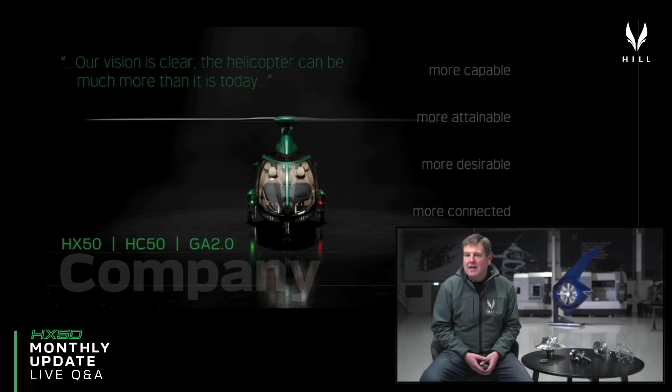Something that's more capable, more attainable, more desirable, more connected, and more owner-centric than ever before. And when you deliver a product like HX50, HC50, and the whole ecosystem for how we want these aircraft to be operated out in the world, it's not surprising then that the market resonates with you.

So in terms of our performance out there in the world, we're now up to 432 aircraft across 40 countries. That's 373 HX50s and 59 HC50s. We're absolutely delighted with the support that we've been given from around the world, and that really is a big motivating factor for everybody here in the team in the UK and our other staff around the world. So thank you very much for the support. We're absolutely delighted that the products are going down so well.

Of course, with a big order book and the need to deliver this aircraft, the team is also growing. I think I mentioned in some of the customer updates over the last couple of weeks since Christmas that we're currently advertising for a further 8 technical posts, and there's some more to come. We've been promoting some of our key people internally as well.

So Martyn Watson has now taken on the role of lead airframe systems engineer. We're going to talk more about the work he's doing later. And Stuart Marshall has picked up the role of lead GT50 engineer, so he's looking after a lot of the value engineering, the production engineering, and pushing that GT50 into a manufacturable artifact that we can get on the bench and test. So very, very pleased with the performance of these guys and the team in general. It's all going really very well. So that's all great.

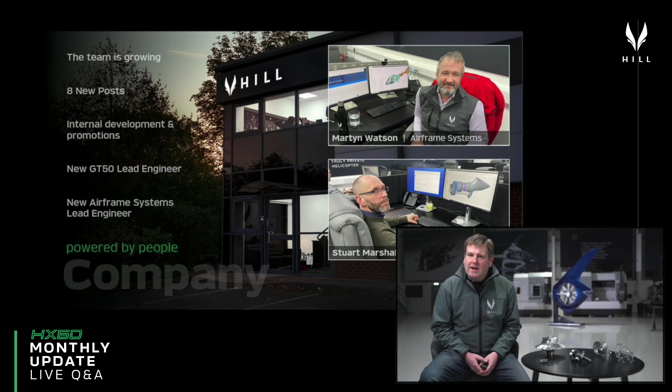In addition to that, you'll be aware from the materials we've pumped out on various platforms that our vertical integration agenda is crucial to delivering this aircraft at the price point and timescales we're indicating. As we continue to move towards the prototype build, the DC facilities are growing and expanding to meet those requirements. The major things going on in the DC at the moment in terms of building the capability and the business to build the aircraft: we've now procured a very advanced coordinate measuring machine and a metrology suite.

This is a temperature controlled environment that's going to be fitted just over there, allowing us to measure to extremely tight tolerances and high degrees of precision and accuracy the precision components we make - the compressor, bearings, gears, and a lot of the internal and flight critical components for the engine. That's a very key capability, and we've taken our time to get the right kit there because there are a lot of options out there. I'll talk more about that later. You can actually see the Leitz machine we've purchased in the top right hand corner of that slide.

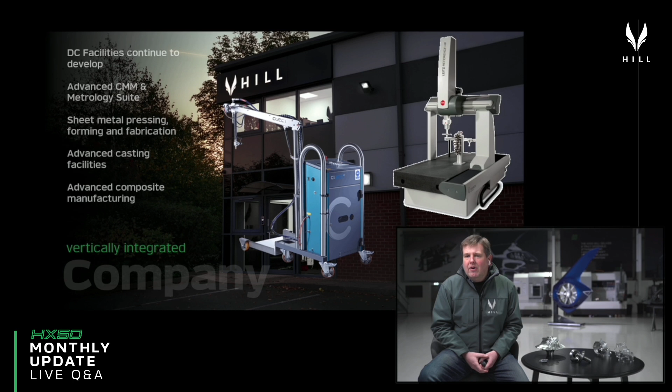We'll talk a little later about our annular combustor, but in addition to switching over to it, we're having to develop all of the manufacturing processes to deliver the sheet metal work in these complex, high-grade, nickel-based super alloys - to form those parts, weld those parts, fabricate those parts. There's a lot of work going on with experts both in the company and outside the company to bring that capability in-house. Although these materials are very advanced and the combustion system we're using is state-of-the-art, the equipment needed to press, swage, form and weld these materials isn't that sophisticated. So it's relatively inexpensive equipment that we're procuring.

Another big area, of course, is the casting capability. We've had all of the proposals back now from our suppliers for the shelling facilities, the wax facilities, the air cast and inert environment casting equipment, and we're in the final stages of getting that signed off and into the DC so we can cast the key cast components in-house. We're not held to conventionally understood industrial prices for these sort of things - we've brought it right back to what it really costs to make these parts. Very pleased to see that developing nicely. Bit of work left to do on it, but that'll be here very soon also.

The big news from the last monthly update was the successful completion of the third scale fuselage - this single piece composite fuselage that's critical to delivering our aerodynamic performance, crashworthiness, and the ride quality and dynamic response of the aircraft. The next stage is to get that process in-house so we can do all of the full-scale work right here at the DC for building the test articles and then the flying prototypes. You've been introduced to the infusion pump, the heart of all of that, but all of the peripheral equipment is now also on order and will be arriving over the coming weeks. Pleased to see how the general development of the facilities is keeping pace with the broader development program of the aircraft.

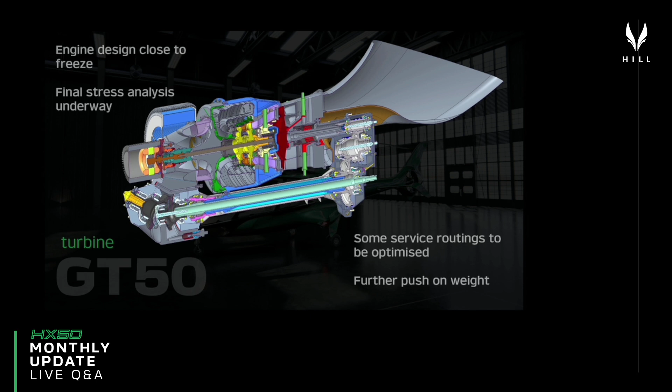So the engine in the new configuration - the much more compact vane diffuser, the annular combustor, and the new 9+9 bladed compressor - is almost at the point where we can freeze the design from a mechanical and operational perspective. That then allows us to move into a final pass through stress and lifing, and then we are literally ready to start building all of the components across that engine.

There are some service routings that need to be optimized. There's an opportunity to take a fairly significant amount of weight out of the engine by optimizing the gas generator bearing housing and also the power turbine bearing housing. That's the last area we're likely to be freezing the design for before it goes through stress and onto the bench.

That gives us an opportunity to have a final push for weight before we put it through stress and lifing. So very pleased with where we are on the engine.

I'm very pleased with the engine design, full stop. It's very elegant, very simple. We've managed to avoid building complexity into the engine as we've gone through development, which is often the case. All of the systems, the turbo machinery, the bearings, the spring bars, everything's looking really good on that front.

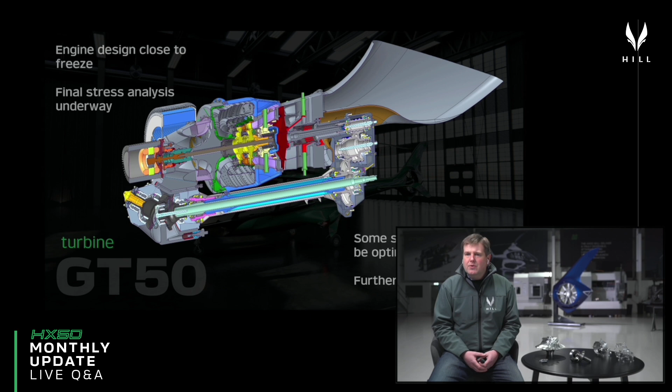So pleased with the development of it, very keen now to get it through stress analysis once more and start building these components. To that end, we demonstrated during the live event just before Christmas that we developed the ability to produce compressors in-house.

The compressor we produced was a 10-bladed unit derived from an original 12-bladed design that had been passed off aerodynamically. Working with both the production engineers and the aerodynamicists, it became clear the optimal solution was going to be around 9 blades with 9 splitter blades.

It's a little bit more challenging aerodynamically because you've got less guiding for the flow. It's more difficult to get the work you need into the airstream. But with a fair amount of CFD optimization and a lot of experience from our compressor team, we've now managed to get the performance in terms of overall efficiency of the impeller and also its stability, its surge margin, to a point where we're almost like for like with the 12-bladed design.

But of course this affords us significant advantages from a manufacturing point of view. We can get much bigger tooling into the cavities, we can machine the impeller much faster. The other advantage is that because we're using bigger tools, bigger ball noses, we have bigger root fillet radiuses at the roots of the blades that you can see on that impeller, and that improves the structural strength. It reduces the peak stresses in the compressor, improving both our fatigue life and our burst margin on the impeller.

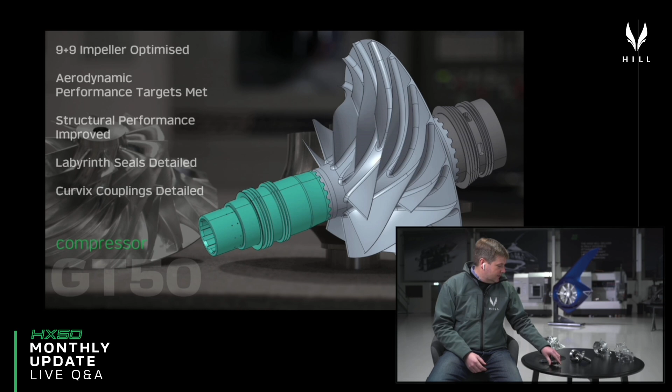The other thing I may have pointed out to some of you who were here with us last month is that when you take the compressors, the other thing we have to do is pressurize the back face of the compressor within the engine. So we create this labyrinth seal around the back face so that essentially we can pressurize the outer diameter and bleed off the pressure on the inner diameter to manage the axial forces this compressor generates by virtue of the pressures it generates along the shaft of the engine, and so manage the life and durability of the bearings.

So those sealing features have all now been optimized, and they're built into the machining operation and the compressor itself. Really pleased with where we stand on the compressors. The titanium from which we'll actually produce the test article is on its way to us now, and we'll shortly be producing 6 actual test specimens of the impeller to the design you can see on the screen. Pleased with how that's moving.

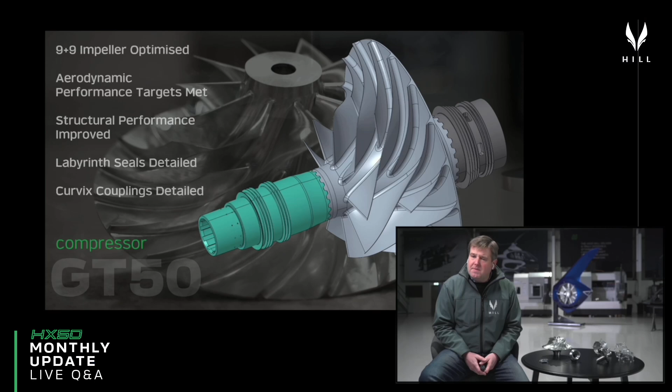There's a little bit of development work to go back and do on the compressor test rig now to allow us to test it, but that'll also be underway shortly.

In terms of how we actually manufacture these components, one of the real benefits of our vertical integration strategy is that all the stuff you generally need to do after you've built and developed your prototype and you're trying to upscale to production, we're doing right now. So what I'm showing you here is our second generation approach to how we produce these impellers.

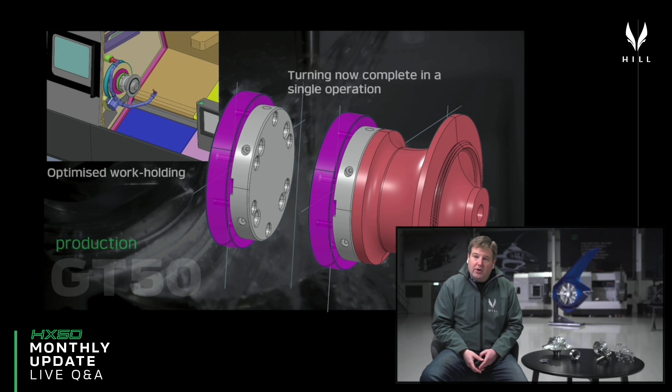The picture in the top corner is the CAD model of the lathe that sat right behind me, and it's a new form of work holding that allows us to cut the blanks from a plain bar, both front and back, in a single operation. By holding the compressor stock in a more intelligent way, we can machine everything we need before we put the machine on the 3-axis for the Curvix and then the 5-axis for the blade cutting.

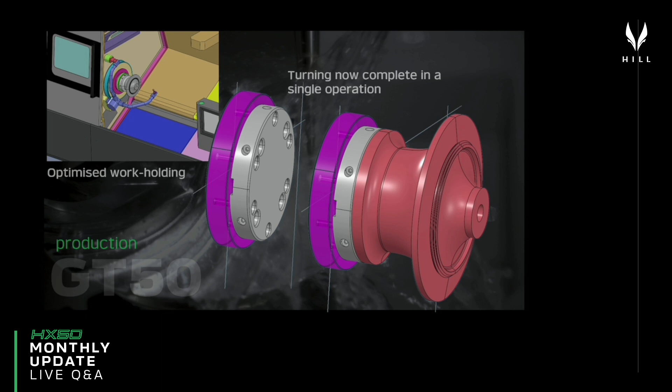That dramatically simplifies the number of operations needed to produce the impeller and the speed with which we can produce it. The unit that's now developed to sit on the lathe can also fixture on the 3-axis machine to put the Curvix in, and the 5-axis machine to then cut the blades and all the other details. So the whole production process for the impeller has been dramatically improved over the last month, as well as the design and mechanical detail of the compressor. That's all coming together very nicely.

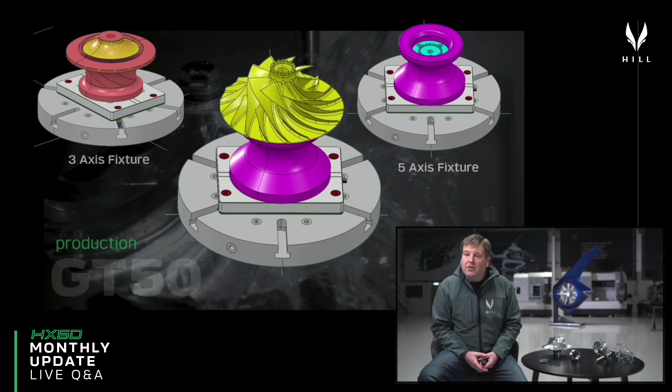The other thing, once you've got the process down to a point where it's stable, we need to make sure we're making what we think we're making. So one of the other areas we've been developing over the last month is the capability to measure these complex blade shapes to ensure the blade geometry is what the design intended, and that the process for cutting, stress relieving, finishing the cuts, and everything else we need to do to cut away all that excess material is doing exactly what it's supposed to.

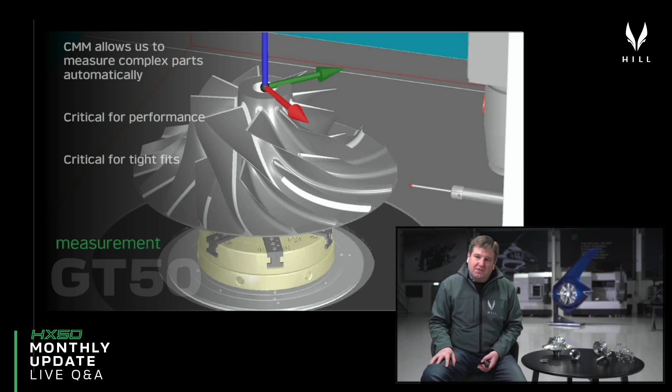The coordinate measuring machine allows us to essentially automatically plot and measure the entire surface of these compressors, and this is not only a development process we use, but also a quality control process we'll use as part of the production process for these parts. So when the thing comes off the machine, not only do we know we've got a quality part, but we also know it does exactly what the design intended it to.

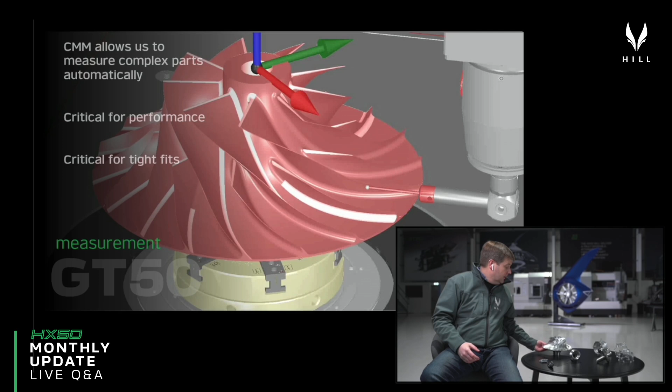This is critical not only for the aerodynamic performance of the impeller, it's also imperative for the balance of the impeller. As I've mentioned before, a very significant amount of both the efficiency of the impeller and the surge margin derives from the tip clearances between these blades and the casing the compressor sits in. If any of these components are not manufactured to drawing, you lose all of those tolerances, and so you lose a lot of your performance and stability in the compressor.

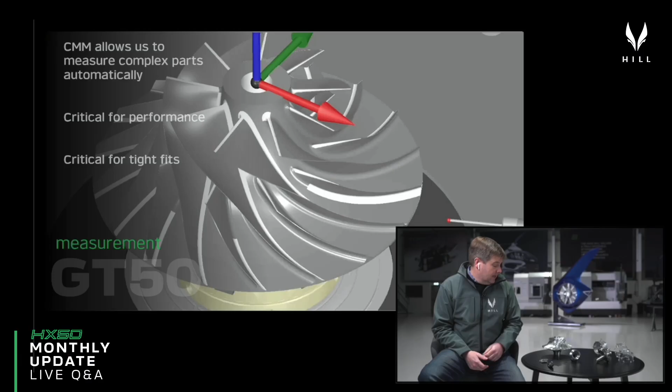So this is the process we use to control all of that. The program by which this will be executed has been developed by our CMM partners, and all of this kit will be coming in-house shortly. So very pleased with the whole compressor program—it's exactly where it needs to be at the moment.

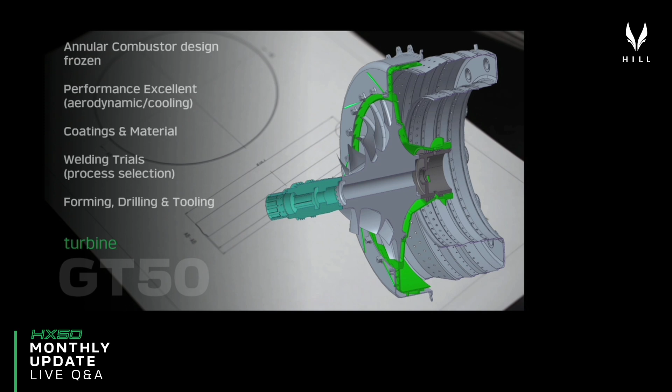In addition to the compressor, you're aware that we've moved to the annular diffuser, which you can see there in green. Both the aerodynamic design and the structural and mechanical design of that are now stable. There's a few minor areas where we're likely to refine it over the coming weeks before we finally freeze it, but essentially we've got a very simple arrangement now that has the minimum number of parts while still giving us the structural stiffness, the isolation of the pressure and thermal loads, and the integrity at the seals we need to hold the tolerances around the compressor. Pleased with the way that's coming on.

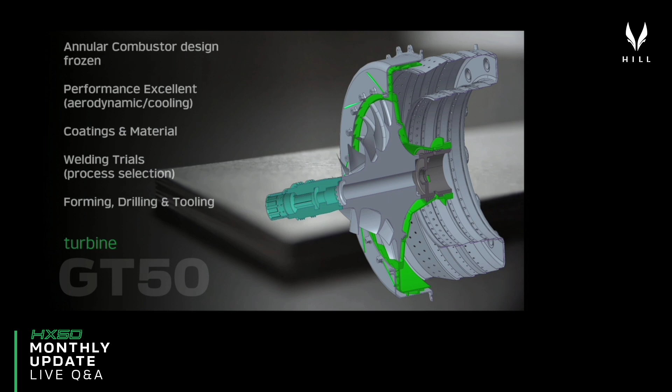In addition to the diffuser, what you can see on screen there is the compressor, the diffuser, and also the annular combustor. Now, the annular combustor is a fabrication made out of nickel-based superalloy sheet material, so the design of that has now essentially been frozen from a performance point of view.

The pressure drop, for the most part, for almost every area of the design envelope, is below what we've included in the performance calculation, so we should get better performance out of it than we've been predicting.

The cooling, the way these devices work, is we bleed cool compressor delivery air over the surface inside and out of the combustor to maintain the metal temperatures well below the flame temperature of the combustion system. That's how you get the life and integrity of the combustor. The optimization of the whole cooling distribution pattern has now got to a point where we can't learn much else short of just building and testing the thing.

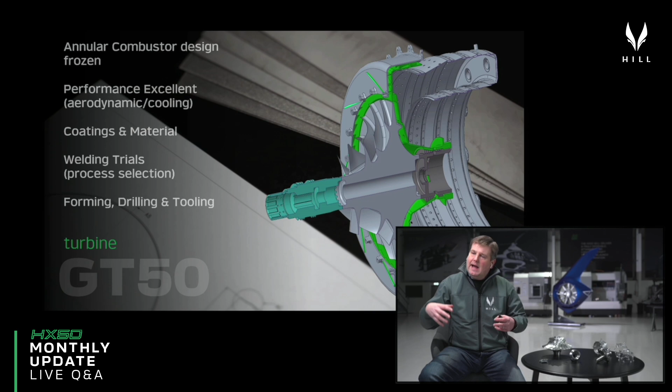So a lot of the focus over the last couple of weeks has been about design for manufacture, designing the tooling, breaking out the parts that are going to be pressed or rolled, looking at how we can assemble the thing since it's quite a quirky shape to make, and looking at the jigs, rigs and fixturing we need, as well as the welding process.

There's a couple of material choices still up in the air at the moment, where we need to essentially choose whether we use an expensive material without a protective coating, or a less expensive material with a protective coating. There's some trade-off studies going on to make sure we get the life we need, both cyclically and in terms of hours, that this unit is designed to. So pleased with how that's going.

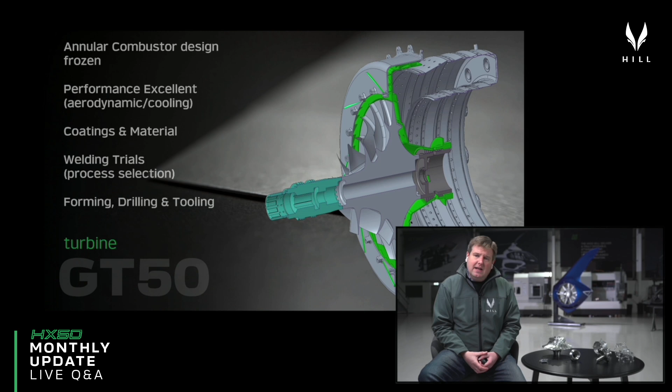The background video you can see is the first test specimens of materials that we've had in. They've subsequently gone out for weld trials, so we're tuning the welding process we're going to use to assemble the subsequent parts within the combustor to deliver that complex shape you can see there.

The other thing that's been going on is, as you can see, the whole annular combustor works using a very large number of precision holes. There's about 2,100 holes in the annular combustor casing, and all of those are very tightly toleranced. They're very sensitive to their position, their roundness, their shape, and their surface quality within the bore of the hole.

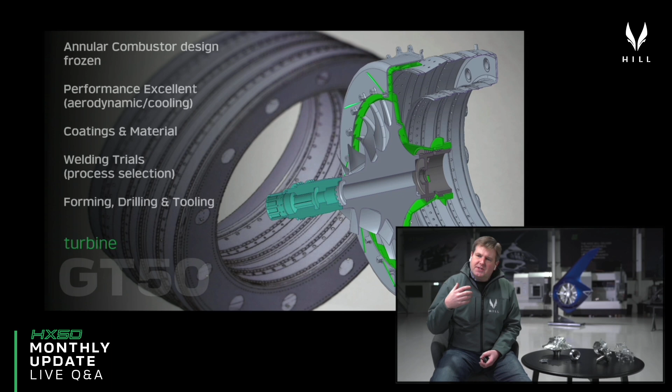So we're looking at a range of processes to maximise the value engineering we can do to produce this part cost-effectively. The raw materials aren't that expensive, so it's all won and lost on how you actually fabricate it and how quickly you can put these things together. That's been a particularly successful piece of work that's been ongoing.

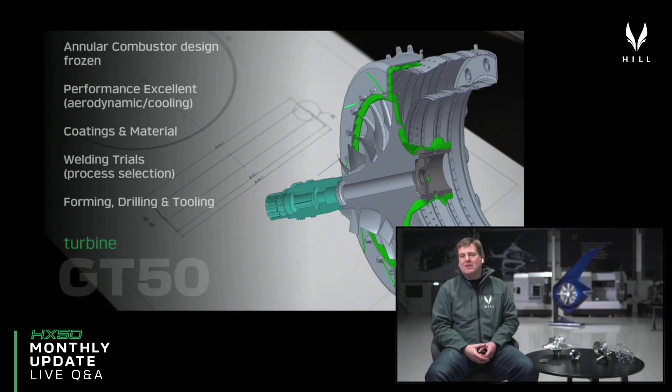We've drawn a couple of specialists out of retirement to support with the actual metal forming, guys who have worked on these combustors for a number of other engine manufacturers over the years, and their knowledge and insight when picking up these sorts of things is absolutely invaluable. So we've got a very straightforward way to produce these things.

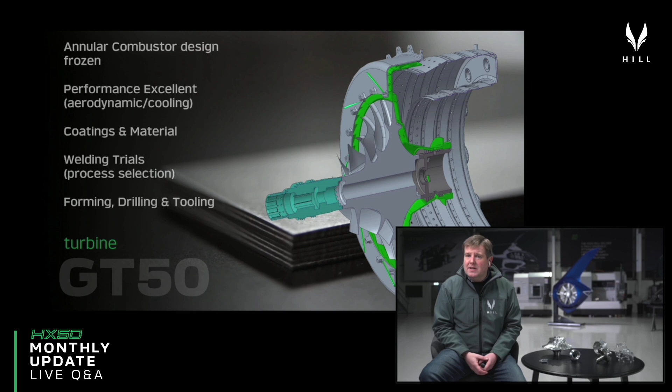We're just about to start designing the press tools and the rollers we'll use to form the parts, and then we'll be producing one of these in the coming weeks. So pleased with the process on the annular combustor also.

The other big area, and the last of the turbo machinery elements to be formalised, is our turbine nozzle for the first stage of the gas generator turbine. This is the hottest part of the engine, seeing the worst thermal cycles and the highest thermal stresses, and needs the most care to ensure we don't end up with an inadequate cyclic life or premature failures when we put it on test.

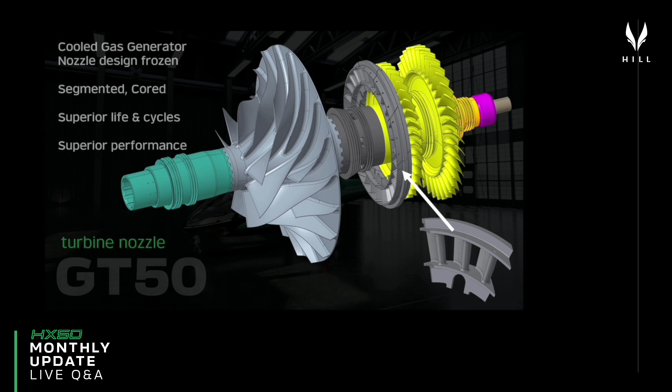Originally we'd hoped to do this as a solid ring, but the more we've looked at it and optimized it to hit the performance levels we want across the wide range of operating conditions needed, we've ended up opting for a cooled nozzle. That essentially drives you to make it as a series of segments hooked into place in a retaining plate in the engine, rather than as a single ring.

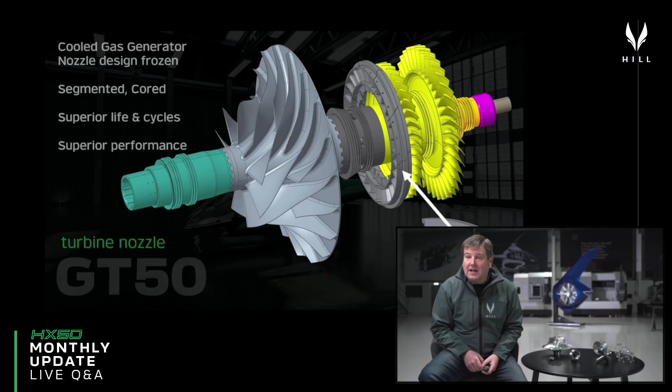These segments have holes in the top and bottom of the platform, and they bleed cooling air through the center of the hollow aerofoils and out through the trailing edge of the blade. This allows us to run the engine hotter than would otherwise be possible, improving fuel efficiency and power density, while also letting us control the metal temperatures in these parts better and ensure we hit the cyclic life needed to meet the performance declared as part of the GT50 specs.

So another area that is almost, very nearly complete now is the mechanical design of the power turbine. GT50 has a rear power takeoff, so the drive shaft that actually turns your main rotor comes out the back of the engine and then mates with the speed reduction gearbox, which we'll show you the casing of shortly.

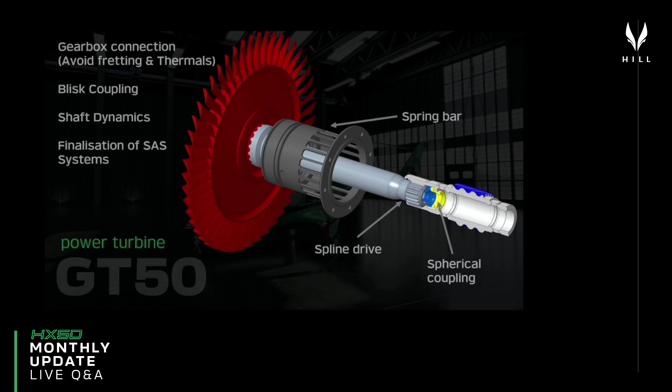Now all of these shafts within the engine essentially have to have a suspension system like your car does, so they're mounted in what are known as spring bars. The grey component you can see on the slide is designed to be a lot more flexible than the engine casing itself, and to isolate the rotor dynamic modes of vibration of the shaft from the casing stiffness. That allows us to maintain the shaft stably in high speed rotation while the engine's operating, in this case, at 36,000 RPM.

What you can see on this slide is we've designed a very intricate spherical coupling that sits within a spline shaft that drives into the main rotor gearbox. This allows that power turbine to bob around cantilevered in the spring bar damper and maintain stable operation with the degrees of freedom it needs to isolate it from external sources of vibration. So that design is also complete.

We had been doing some work trying to use a Curvic coupling to see if we could simplify the manufacturing process—that's the coupling you can see between the drive shaft and the red blisk itself—but it looks like that's not going to be the optimal way of doing it. So we'll probably end up returning to a friction bonded means of attaching the stub shaft to the back of the blisk. But essentially, the new blisk is aerodynamically designed, it's now structurally designed, and the drivetrain's all looking good.

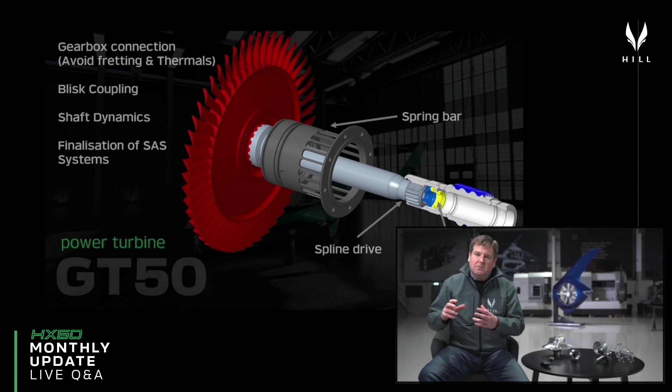We've managed to design the coupling into the speed reduction gearbox and get that to a point where we're satisfied it won't fret and it'll be reliable. That's all looking very good and is very close now to being frozen. The only thing pending now is hopefully being able to shorten that shaft a little bit as we deal with the secondary air systems.

Okay, a big area that we've been working on quietly in the background is our in-house casting capability. A little while before Christmas, we carried out some casting trials where we melted down some super alloy and cast a nominal ingot using an inert environment casting process rather than a vacuum casting process. The idea is if we can make that work, it allows us to use machinery drawn from the jewelry industry rather than conventional, hugely expensive vacuum investment casting furnaces.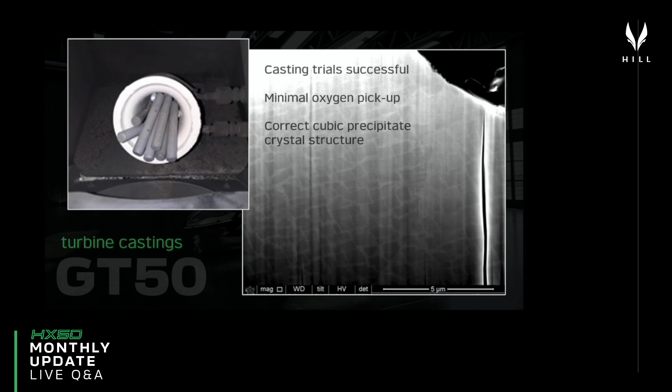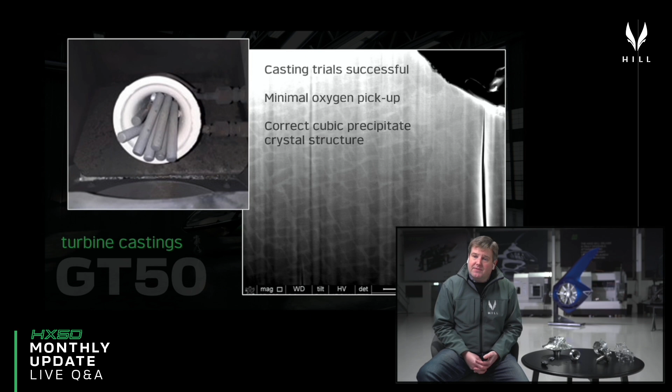Moving on from that, we've also now secured all of the casting equipment we need to carry out this work. So we're now in a position to bring the casting process completely in-house and have complete control over what would have traditionally been the most expensive parts of a gas turbine engine. We're very, very pleased with the progress we've made there. That's great news—so casting looks good.

If we now talk a little bit about the drivetrain for the aircraft, there's been a vast amount of detail work going on this.

So the drivetrain itself has been fairly stable for over 6 months now, and we're very much down in the weeds now dealing with all of the intricate details that you need to make these things reliable and manufacturable and to have the long life that all of these components need.

So one of the areas that our drivetrain, powertrain lead engineer has been focusing on is the lubrication system for all of the gearboxes.

So what you're looking at here is the drivetrain that's strapped to the engine. You can see the speed reduction gearbox at the back of the engine. I'm going to take you over to the bench in a second and show you the housing for that, which we've just been machining - we just finished the machining off of that this month. And then you can see the drive shaft that essentially goes forward into the bevel box and then up to the main rotor gearbox.

Now, what we've done is we've essentially completed the scheme design for all of the lubrication system for this. The engine and the engine drivetrain share a lubrication system, and it's a forced lubrication system to make sure that we've got the right quantity of oil delivered at the right places, particularly in the critical areas of the gearbox up at the very, very high speed end.

So we've now got a stable lubrication system, and essentially the next step for this is to build it and test it. So when we come to look at the tail rotor gearbox in a second, I'll talk about how we test the lubrication system and how we validate all of that.

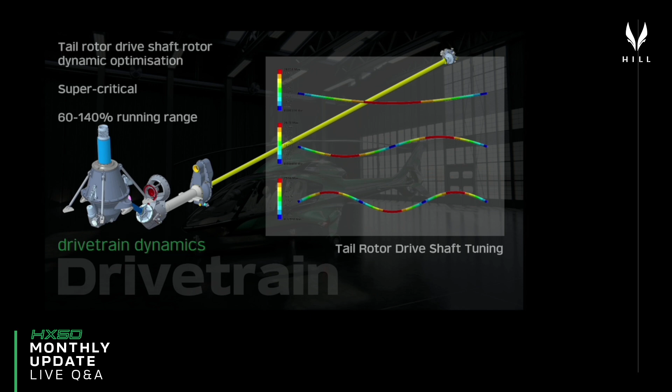And our favoured approach for this, like with lots of areas in the aircraft, is going to be a carbon fibre drive shaft, because it gives us improved stiffness, improved rotor dynamics, improved damping, and of course it's something that's nice and easy for us to manufacture in-house with our composites capability.

So the whole drivetrain system now is very mature, and we're just really waiting on some test articles to come off the equipment and to get some of these things out to test so that we can validate that the thing does what we think it does.

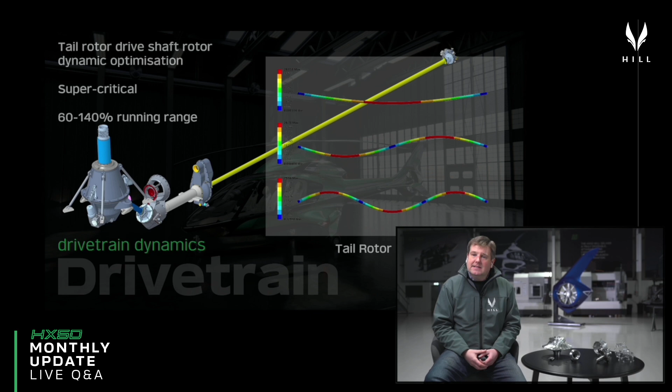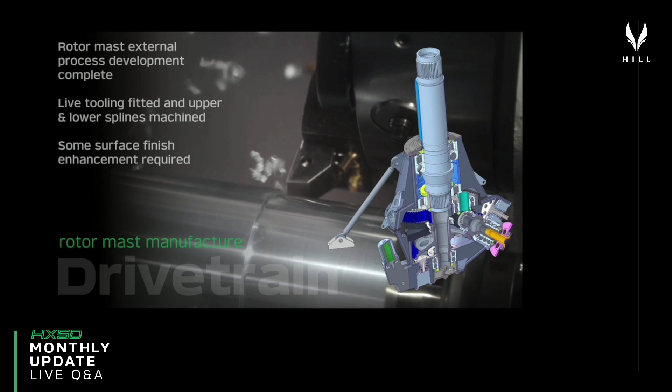So at the last update, we showed you the first stages in manufacturing the main rotor mast, and we've now completed that. When we had the live event last month, we hadn't yet received the live tooling that's required to cut the splines, which are the tooth features that are on the top and bottom of the rotor mast. Now you need those teeth to be able to drive the rotor at the bottom and then drive the rotor head at the top. And all of those things have now been completed.

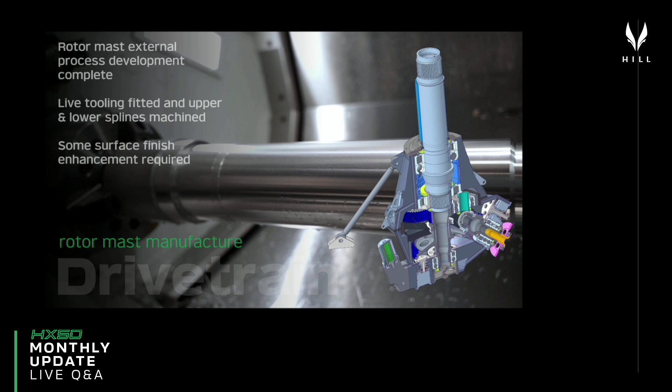So if we just quickly have a wander over to the bench at the back, I'll show you the rotor shaft as it's come off the machine, and we can also show you the speed reduction gearbox casing, which has also now been completed.

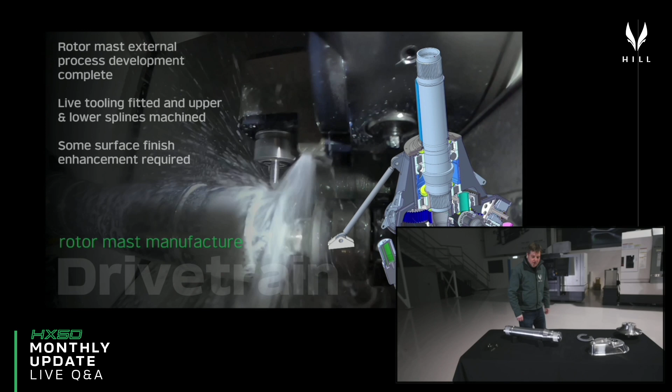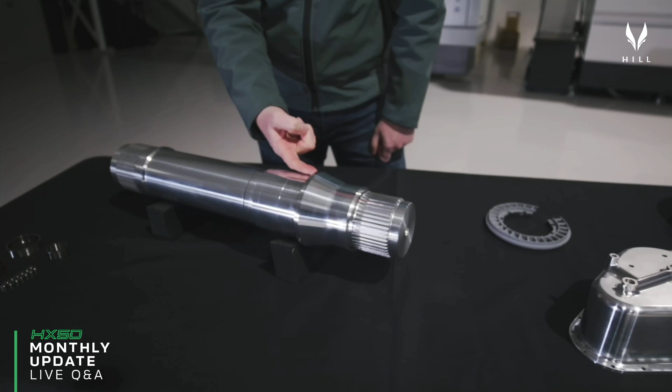So at the previous live event that we did, we were able to demonstrate the cutting of this external profile of the main rotor shaft live on the machine, and subsequently we've been back and added the teeth at the top and bottom. Just so you understand, this is the bottom - it's this face here that carries the entire weight of the helicopter. And then you've got various other sealing faces and assembly features along the shaft.

The only thing that's not complete in this at the moment is we're waiting for a boring bar so we can go in and remove the excess material from the inside, and then that essentially is the vast majority of the mast manufacturing processes completed. All we need to do then is switch over to titanium to produce the flight components.

One thing I will point out is in this first attempt we've had at producing these spline features, you'll notice that one side of the teeth has a nice high quality surface finish, but there's a bit of pickup on the other side of the teeth. Now you couldn't live with that - we can't leave that in there. That's got to be improved, because that would be a devastating source of fatigue problems for us. So things like that have to get ironed out at this stage before it goes anywhere near a test rig on the ground or otherwise.

So that's the rotor mast. That's shaping up very nicely.

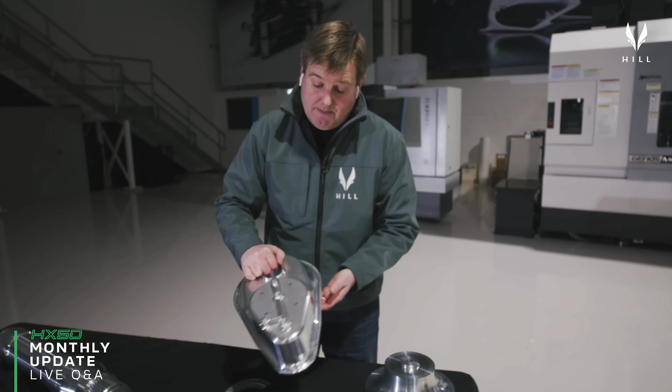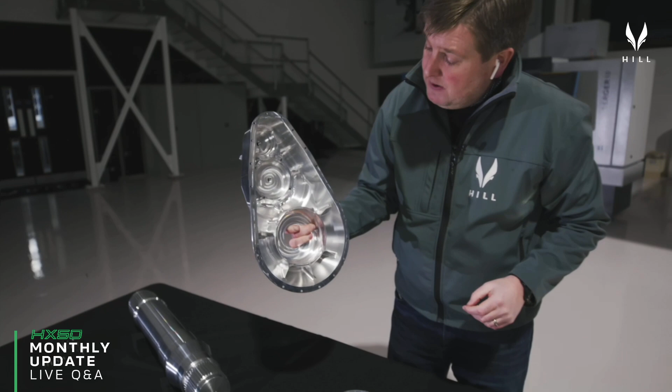The other thing that you will have seen last month is we'd machined the outside of the speed reduction gearbox. So this is the actual speed reduction gearbox that sits on the back of the GT50 engine. Your power turbine sits here. That 36,000 RPM drive shaft drives into the top, and then within there we've got all of these locating features to pick up on the bearings and the other gears to be able to do the speed reduction, to then export 6,004 RPM, I think we are at the moment, at the bottom, and then out to the rotor gearbox. And again, this is really the first one that we've taken off the machine.

There's a lot of tidying up left to do on the inside of there. There's some surface finish issues that need improving. And of course, this is a case that we're going to use purely as a fit and finish demonstrator, a lubrication demonstrator for the first gears that we produce. The actual test articles for the engine will be cast and then finished machined, which is a much more productive, efficient, and cost-effective way of making these things. But it's good to see that's off, it's good to have these components lying around now.

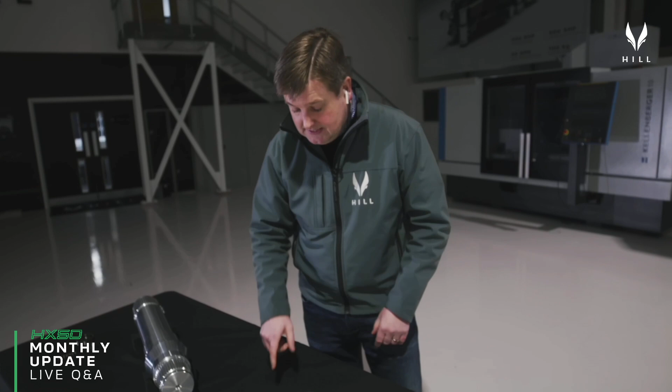And then just to give you an idea of scale for those of you that have not seen the customer updates, I've taken one segment out that I showed you earlier, but that's the first stage cooled nozzle. So the component I introduced earlier, that gives you a sense of the size of that. And that thing handles between 1,500 to 2,000 horsepower worth of energy in the gas stream. It's got to take that flow, stabilize it, turn it into the right direction so it presents at the face of the first stage turbine blisk in the right angle with the right velocity.

So it's a very, very critical part, and it's the one that causes most of the problems in most of the engines that are out there. So it's important to get that developed very tightly before you go anywhere near a test rig. Pleased with how that's coming on.

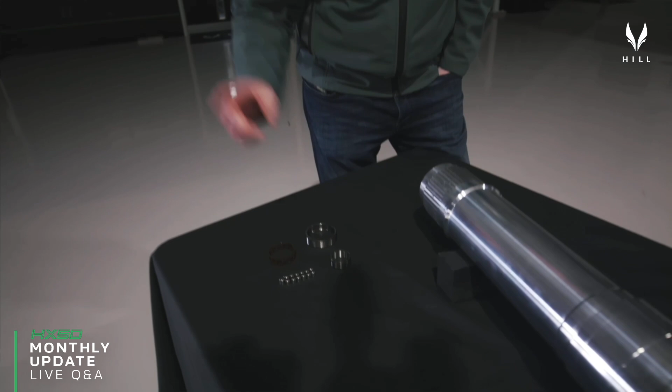Before we head back over there, I'll just point out these components here. One of the things I'm going to talk about shortly is our in-house bearing manufacturer. The very first thing that we're going to do is produce some of these bearings and demonstrate that we can produce the same fit, finish, tolerances as some of the other bearings that are already out there. We're going to be starting with the races. Of course, when you do the races, we can then add flanges and details that make assembly easier, that reduce the weight of the arrangement, and then we'll go on and do the more difficult ones that are integrated with our squeeze film dampers and the big ones that are in the main rotor gearbox. But all of that we'll talk about shortly.

So let's head back over and I'll just talk to you about a few other things.

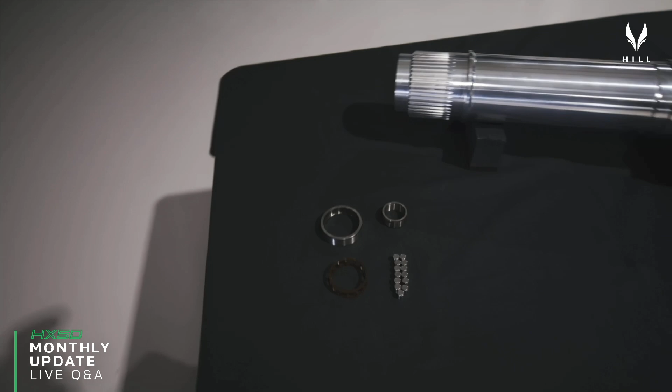One of the other components we're working on at the moment is the tail rotor gearbox. We showed you a full assembled tail rotor gearbox previously, it's actually sat on the tail fin over there, fully functional. What we've got to do now is bring the hardware inside that gearbox up to production standard.

These are the gear blanks that we had made just before Christmas, and the production engineering team are now busily taking these blanks and designing all of the work holding, not just for these gears but for all of the gears within the aircraft, so they can hop from one machine to another and have the teeth cut, get the heat treatment, and then be relocated and clocked into position on the machining centres, ready for the hard machining as a final operation. So all of that's coming on very nicely.

In addition, the lubrication system has now been completed for the tail rotor gearbox also. That will just be a simple splash lubrication gearbox. We've got a little bit of work to do on the chip detector, and we need to increase the size of the sight glass. But other than that, the design of that gearbox, both the drive mechanism, the Thomas couplings, and also the pitch change mechanism, is nicely stable and very close now - in fact ready for its first stage of testing.

This is the aluminium casting casing that contains the tail rotor gearbox. It's a spare one that we've got from building the test rig behind me. One of the things we do to assess how well the system is being lubricated is we replace the metal component that will actually be on the system with a translucent component, so we can physically see what the oil's doing in there.

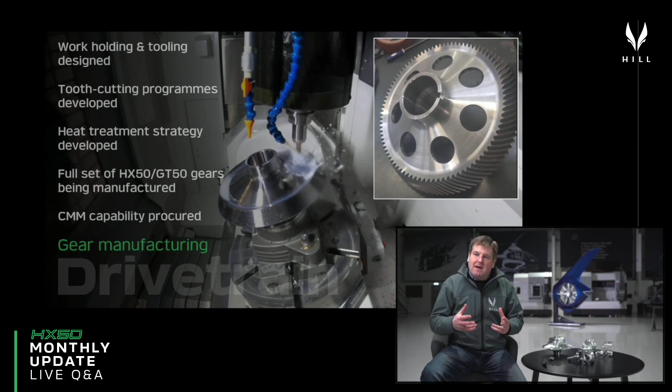We've introduced to you previously the way that we intend to make our gears to control the cost to the best extent possible for these sorts of volume applications. We've developed the process using industry partners that have worked with us, and we've now brought all of that capability in-house.

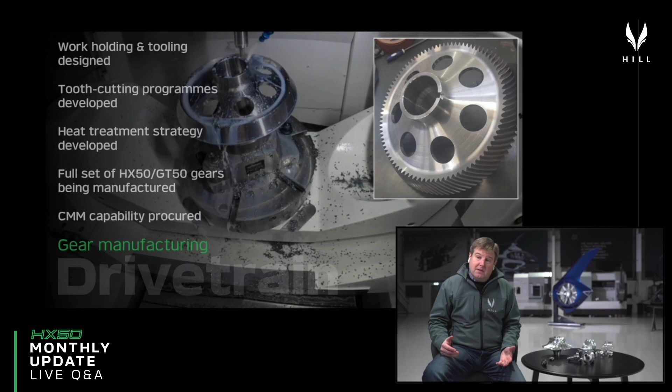The machines to do all of this work are sat right behind me, and one of the biggest activities going on within the company at the moment is the development of the first set of HX50 and GT50 gears that we can then put on long-term fatigue test. So the very first gears we're producing are the ones to go up to Newcastle to be tested and produce the SN curves that form the basis for qualification for the rest of the system.

But while we're doing that, we're also producing all of the main rotor gearbox gears, tail rotor gearbox and engine gears. And so we're developing a unified work holding strategy, a unified tooling strategy, a unified heat treatment strategy, so that we can apply essentially the same process for all of these gears. So that's underway at the moment.

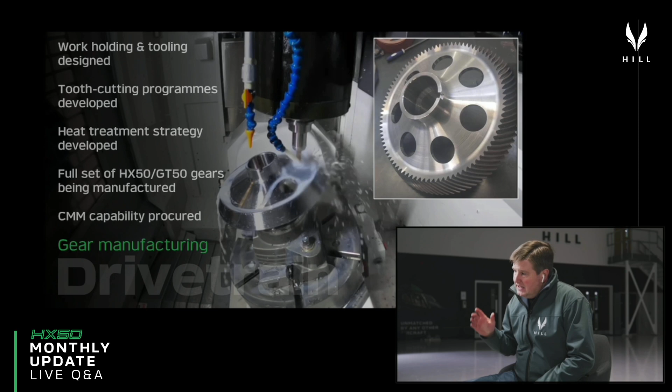It's one of the single most important things that we're doing. Don't expect that to be a 5-minute job - that's a big job. There will be development setbacks along the way, and there's a lot of work to do to get that to just where it needs to be to produce these extremely high quality parts.

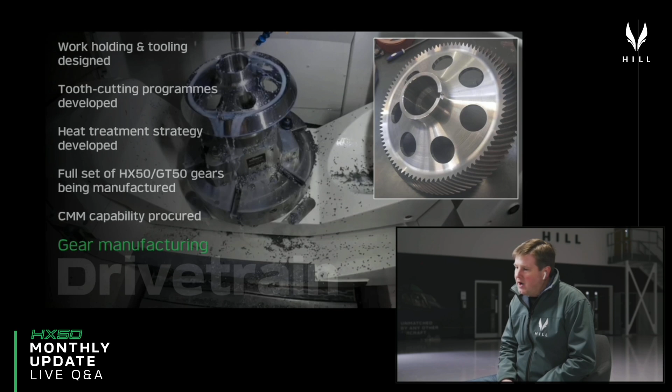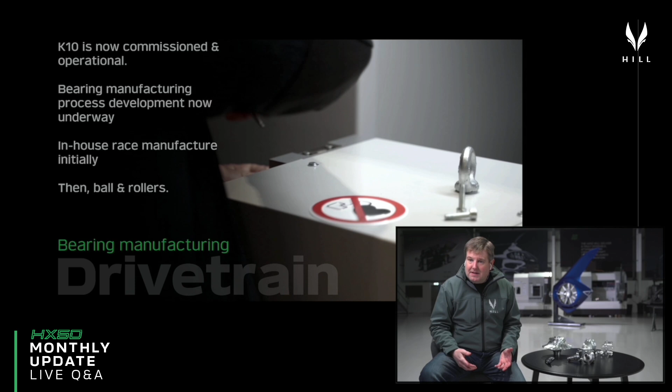In a similar vein, the other big area is the development of bearings, as I've just shown you over there. Aerospace bearings are very, very expensive, and there is not really a need for them to be expensive. The quality controls, surface finishes and performance of these things, by and large, are no different in a light helicopter than they are in other bits of industrial machinery.

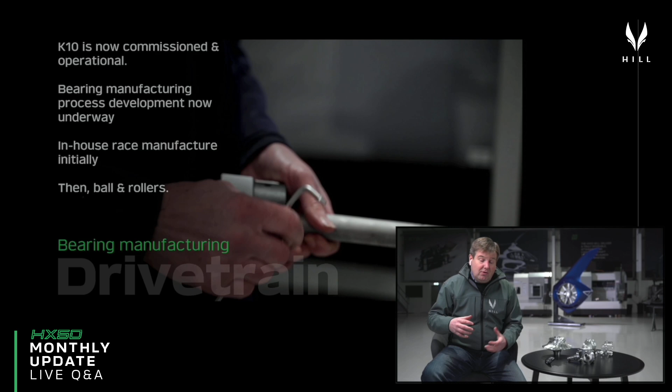And so we've essentially brought the capability to produce bearings in-house. Our Kellenberger K10 internal and external grinding machine is now commissioned and operational, and we're just about to start producing the first Hill-made bearings for both the GT50 and the HX50 aircraft.

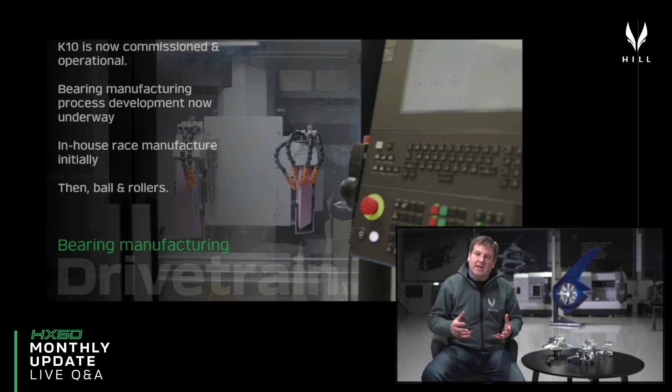So we'll be starting with the production of the races and all of the metrology that needs to go into that—all of the measurement and quality control you need to get those components measured, matched and running to the right tolerances. Then, assuming we've done that, we move on to the balls and rollers, because at the moment we can still procure those externally cost effectively.

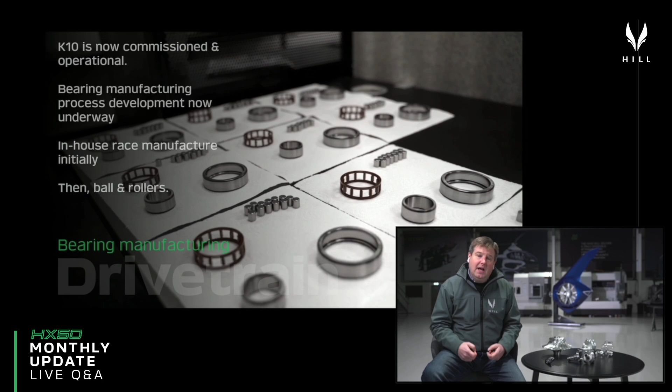So in-house bearings and gears are the primary focus of what these machines are doing behind me at the moment, and that really is the single biggest factor that goes into the cost of the mechanical elements that make up the helicopter drivetrain. It's a really important part of the development process, and the primary focus right now.

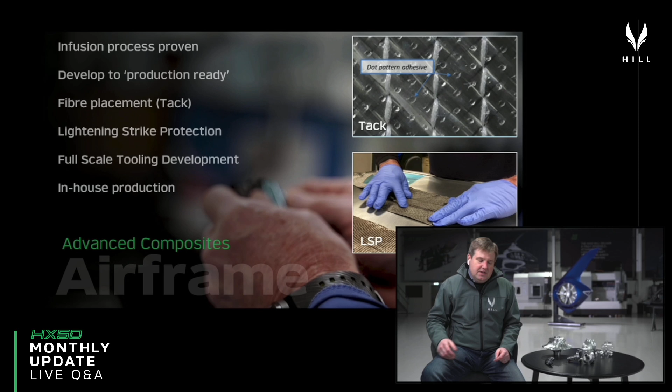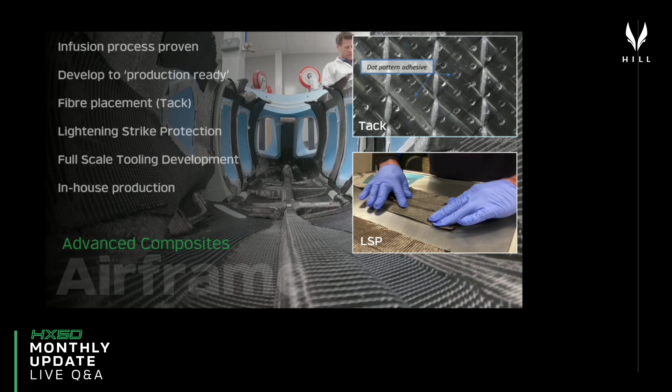The final technical area I want to cover briefly this evening is the airframe. As you'll recall, just before Christmas we showed you that we'd successfully proven our infusion process. Working with Composite Integration and our specialists, we were able to take carbon fibre in its lowest cost format, lay that into a high quality tool, and infuse it with a high quality resin to deliver aerospace grade, high volume fraction carbon composites in a single piece. So we have this lovely monolithic structure.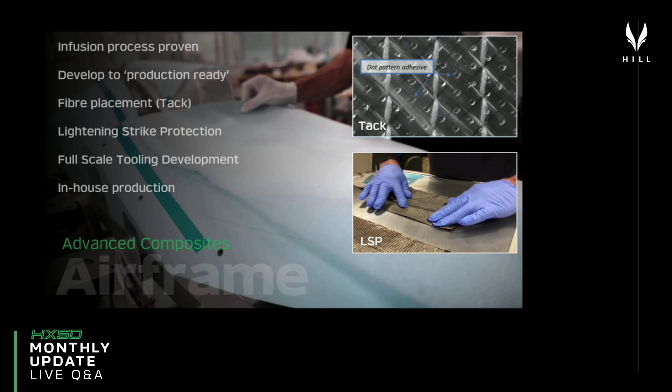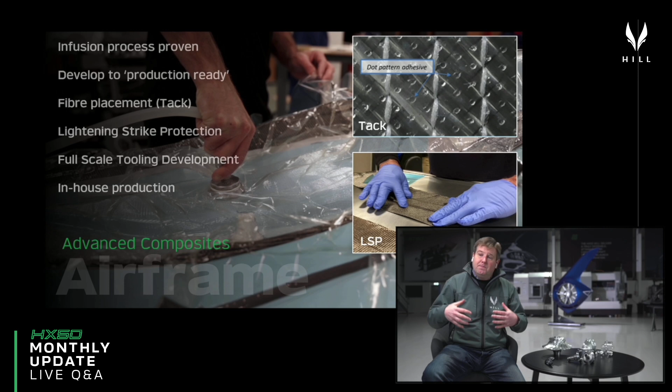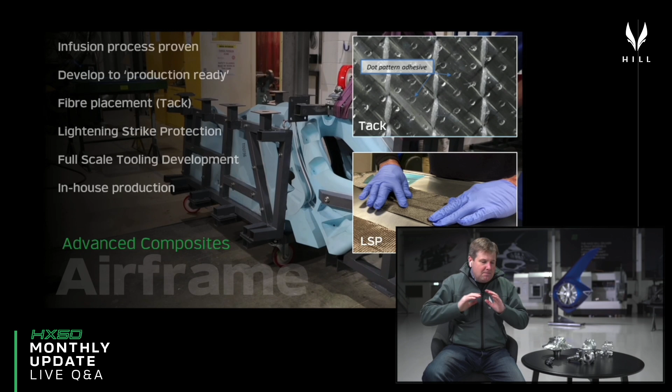What we've got to do now is optimize that process. So Tim and Tim are back together, the band's back together. They're down in Saltash at the moment, looking at some of the learnings from the first one we pulled out of the tool. They're improving the surface finish and improving ways of holding that dry fabric. We're looking at some different fabrics we can use, and we've got the spray tack we introduced before, but there are also other processes for applying tack and attaching the fabric to the mold. The guys are working through those options to push all of the complexity, cost and variability out of the process.

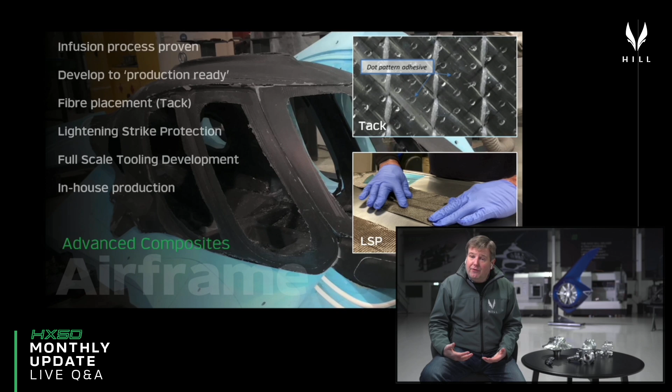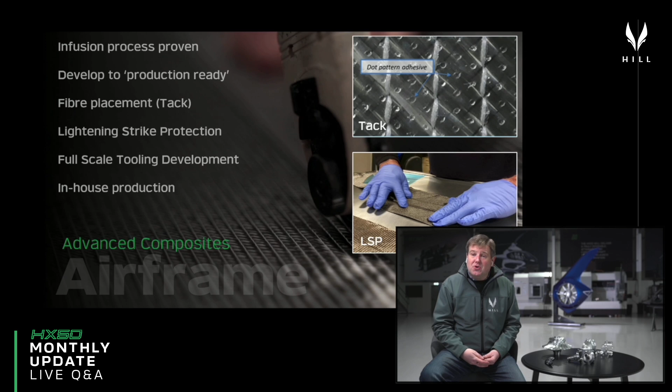This is to give us true aerospace grade composites ready for when we produce the full-scale unit. The other thing they're doing, which you need for a full-scale carbon aircraft, is lightning strike protection. It's vital in a composite fuselage that you have adequate conductive paths built in, so that if you're unfortunate enough to be struck by lightning, it doesn't vaporize the fuselage or cause large-scale structural damage.

So we use the standard copper mesh that's embedded within the laminate. But with dry fabric, it's much more difficult to place that. So the guys have been developing a very intelligent way of holding that material in place within the laminate, so that we can produce these components and deliver all the elements of performance we need from them.

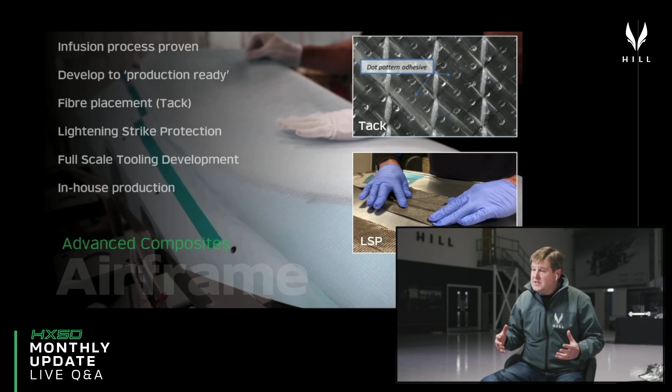Then the two other big areas the guys are working on are scaling the process up to full scale, both in terms of process parameters and tooling, and bringing all of that production capability in-house so we can control the cost, scheduling and quality of these components going forward. So there's a big focus on the airframe at the moment with the composites team.

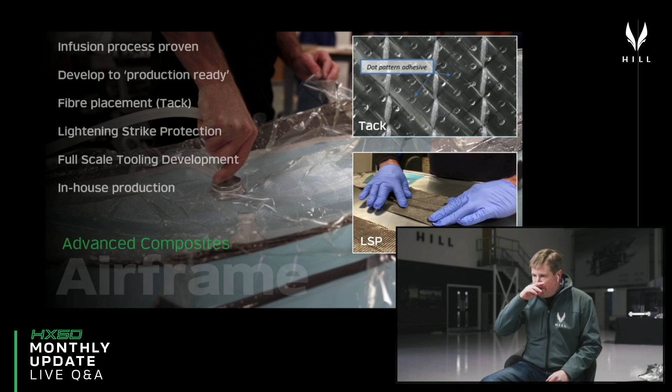We've got a drive on the processing side, and I'll also indicate some of the design issues we're dealing with too. Martin is currently leading the airframe systems element. An airframe isn't just a structure—it does lots of other things too, like how we do the transparencies, the forming, the tooling, and the coatings needed to protect from IR and UV, as well as the bonding of the transparencies onto the composite. All of these detailed design elements are being finalized at the moment.

It's the same with doors—the little things you don't think about: hinges, locks, seals, trim panels. All of that needs to be nailed down before we can do the final pass through stress engineering. So all of that's going on right now.

I'm going to introduce some interesting things we're doing shortly on lighting. There are some really fantastic opportunities in improving the landing light capability and night flying capability with modern LED lighting, and there's a lot of work going on there at the moment, as well as some awkward issues to do with the forward fuselage packaging—the trimmer tank, the flight controls, the undercarriage, and all those sorts of things.

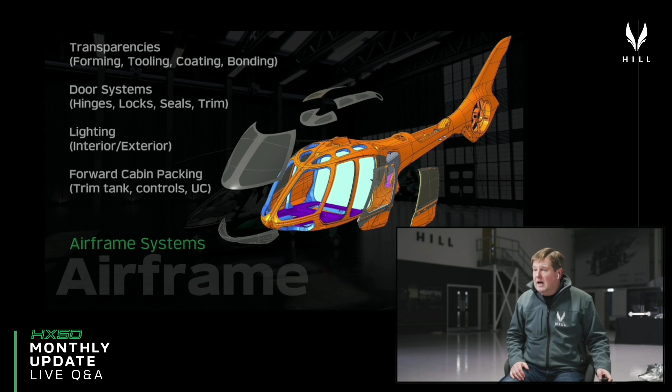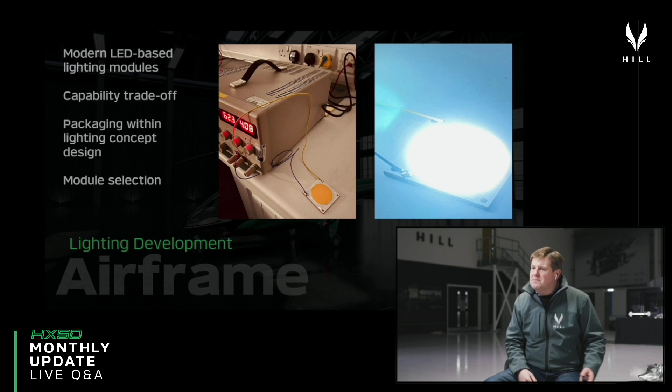Lots of progress moving in those supporting areas as well. One of the trials we've been doing this week with one of our suppliers is looking at just how much lighting capacity we can get into the space available for the landing light. Landing off-airport in a VFR helicopter at night really requires great landing lights, and modern LED lighting gives us great capacity to deliver that. We're currently developing a trial where we'll take various lighting modules and test those before finalizing the actual optical design of the landing lights, because we want to light that whole area like a Christmas tree and make night flying as safe as possible. So lots of selection work going on with specific lighting modules before we finalise the packaging of that.

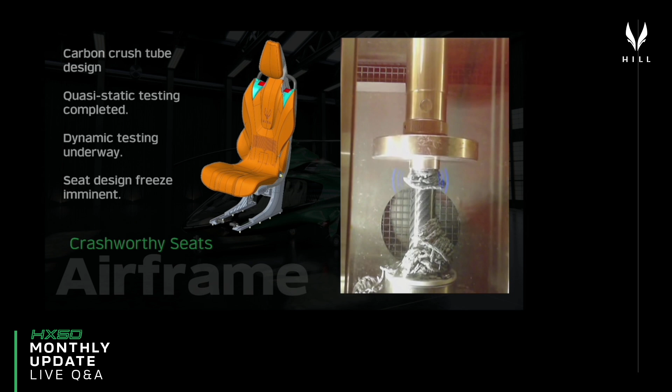The other big area in the fuselage we've been working on recently is crashworthiness. We've talked about how we're delivering energy absorption within the crashworthy stroking seats previously. We looked at a lot of metallic-based systems, and finally opted for a carbon fibre based crush tube because of the energy density of the material, its ability to absorb energy, and its lightweight nature. We've successfully completed static testing of the crush tubes - you can see the tube on a machine being completely pulverized by the downstroking, which is how you absorb the energy. We've got dynamic tests booked shortly so we can look at the strain rate dependency characteristics as well. Once we've got that, we can finally size those crush tubes and freeze the design of the crash seat, so the whole seat can be built and tested as an entity. Really pleased with how that's developing.

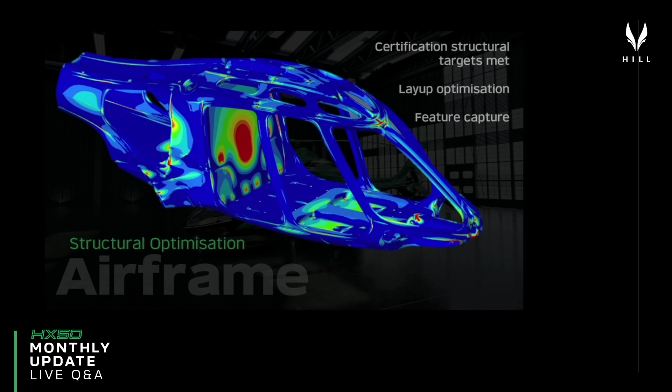In parallel to all of this, we're pushing harder to finalise the full-scale airframe. There's been an awful lot of structural analysis going on over the last month using modern finite element methods - optimizing the laminate, optimizing the layup, optimizing the geometry, and getting the most robust, most damage-tolerant structure that we possibly can. That work has now got to a point where the structure is more than strong enough. It's comfortably within the weight target at the moment, but we do have opportunity to pull more weight out of the structure, and that's what Tim's focusing on now. We're very close to freezing that concept, and then the only thing left to do with the fuselage is capture all the interfaces to the little things like doors and controls, so we can build those features into the final stress model and get that frozen too. At that point, we can produce the first test article and start pushing and pulling this thing for real.

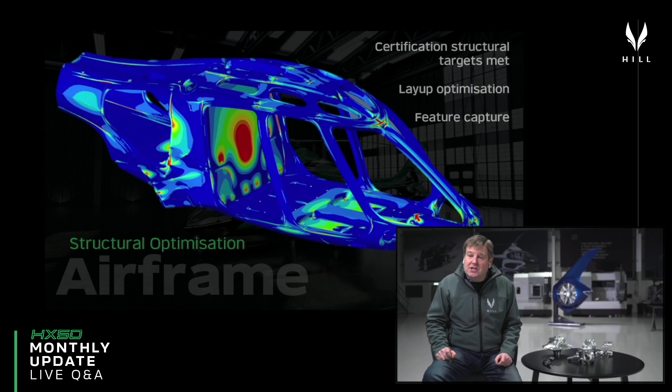Across the program, we're delighted with progress. The engine, the airframe, and the drivetrain, as well as other areas I haven't had a chance to talk about tonight, are shaping up very nicely. At that point, I'm going to stop talking for a while, and I'd like to hand over and give you the opportunity to ask any questions you might have. Thank you very much, guys.